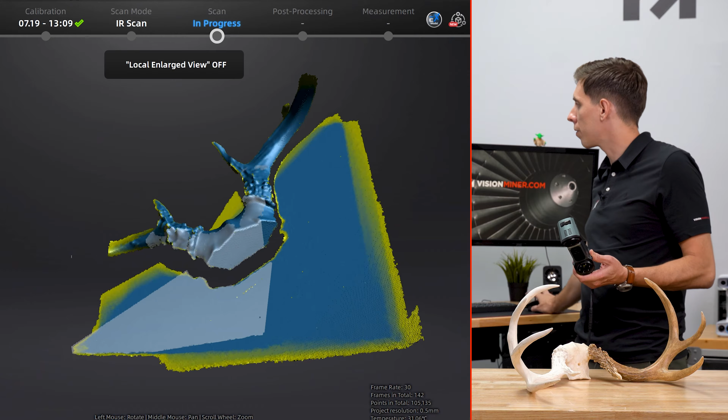Okay, so we're going to start at medium brightness, and we'll leave the working distance 160 to 350 and see what we do. There we go. Hit the button on the back to start. And I'm actually zoomed in too much, so let me turn off local enlarged view. There we go. Gosh, this is nuts. Look how fast that's capturing data. This is just crazy.

Now this will be interesting with all these little antler spires. See if it can track based on that geometry alone. It's doing a great job, that's for sure. I don't have to worry too much about moving the object itself because that's what it's aligning on. And I'm on a flat plane table, so it shouldn't cause much issue.

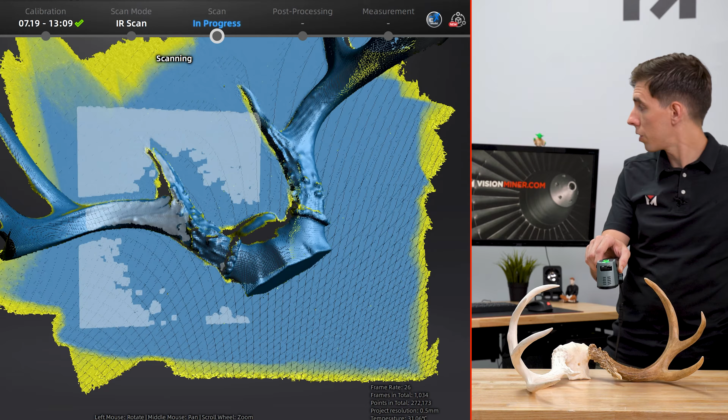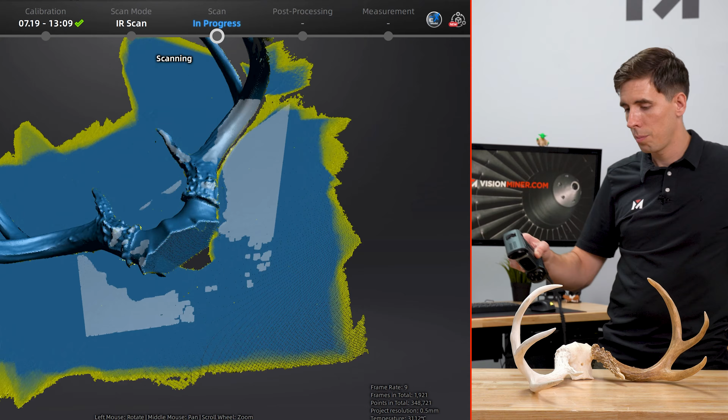I move around my object. And the orientation of the scanner makes a pretty big difference, right? Sometimes you can orient it differently and get better data. And I don't have to get too much of that over there because we will flip this over and then align the two scans to get that underside of this whole object and make a solid object. I'm just going to get as much as I can.

All right, let's check out the data that we got. I'll go ahead and hit pause. Go back here and look. So let's go ahead and do our classic cutting plane. I'm going to click cutting plane and then fitting the point cloud with my selection and hit create plane. Now I'm going to drag that up just a little bit. We're going to delete all that data.

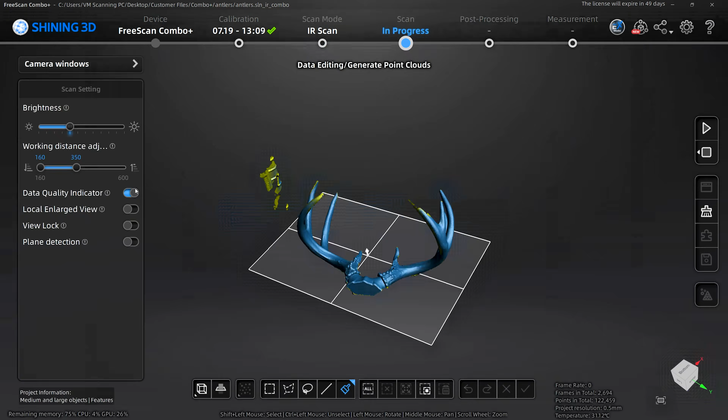So now I'm going to use the connected domain tool to select part of the part and then select the whole part with connected domain and then invert, and that'll select everything that's not the part and then delete that extra data. So I go here, select my part, click connected domain, then I invert the selection and delete. And just like that, we've got the part, the whole part, and nothing but the part. Great, all right, here we go.

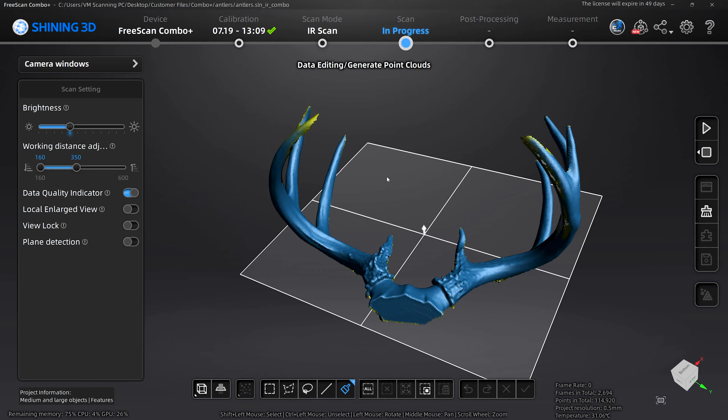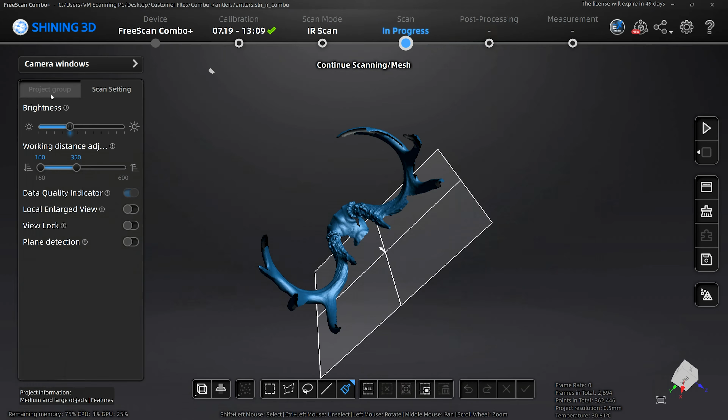Okay, so now to make a second scan, I'm going to align later. I'm going to go into projects and create a new project group. So project group, new project, same specs, and hit apply. So now we've got a blank canvas, and I'll go ahead and just start scanning again.

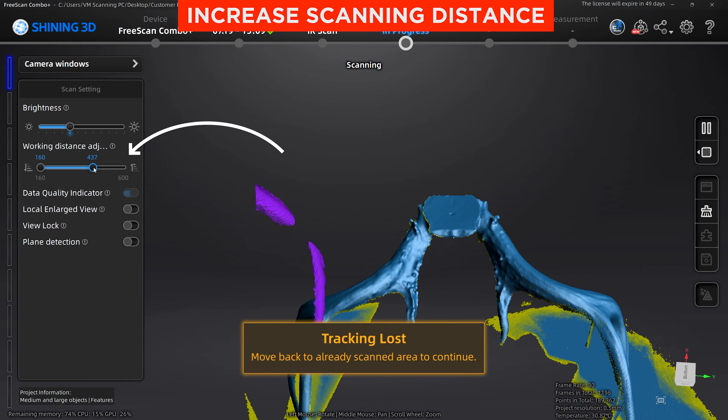And every time it loses tracking, you just got to go back to another area that it's got good data at, and it'll be able to retrack and align itself with ease. Until you've got dense data points in that other area, you might just have to go back and forth a couple times on a complex object like this. I'm going to increase my scanning distance to give myself a little more leeway. See if I can get more data on those tips. Yeah, there we go. It is tracking better.

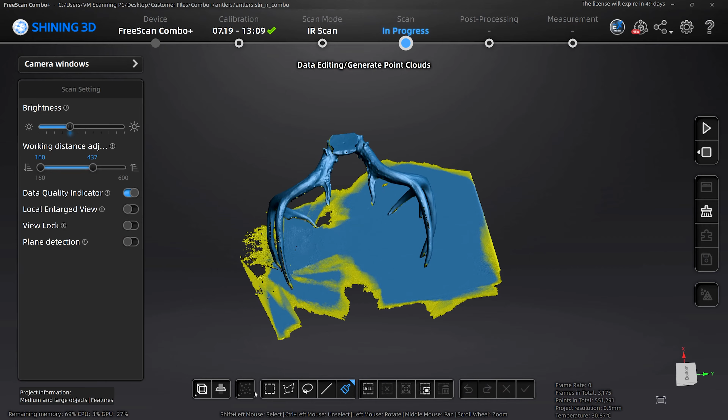There we go. We'll do the same thing again. We'll make a cutting plane, get rid of the extra data. Now I have the option to do another orientation, but let's actually align the first 2 scans first and then pinpoint where we're missing data and need to gather more, and then we can just focus on that area to save time. So in order to align it, I have to generate the point clouds.

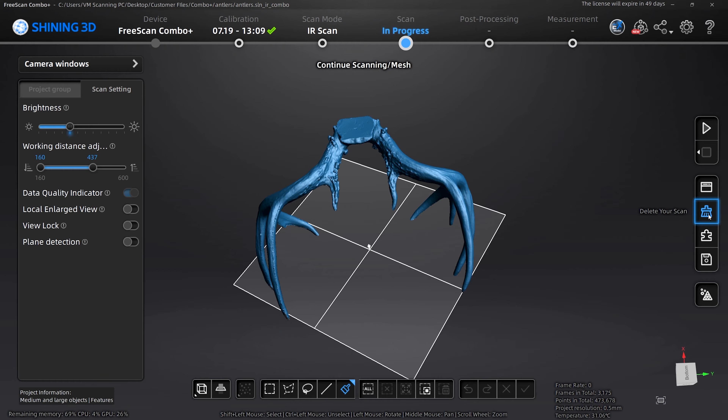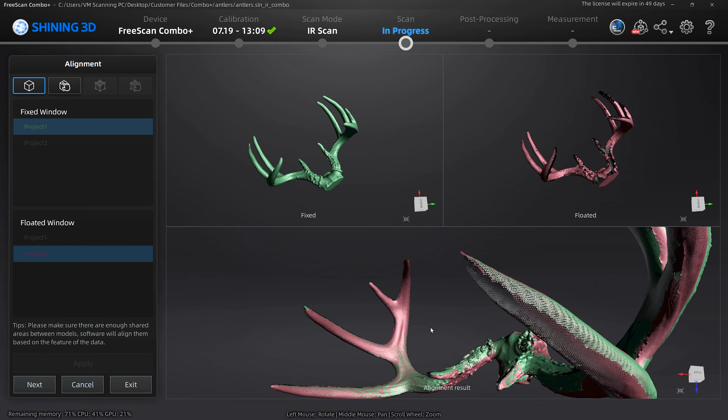Okay, so now we'll head on over here to the Process Alignment tab, and we'll go here to Project 1, Project 2. And once again, we will use the automatic alignment function. If it fails, we always have manual alignment to back it up, but usually automatic works just fine, so we'll give that a shot. And as expected with a part like this, it's very unique geometry. It worked great. So I'll go ahead and hit next and then exit, and let's examine our data.

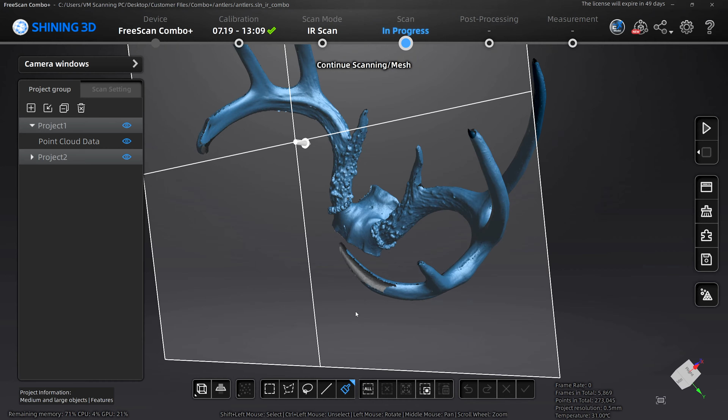Okay. I mean, you know, there's not much missing data here. A little bit on the tips and a little bit of the insides. Oh, and on this side. All right, so I'm gonna see if I can't get those areas first. This should get everything in there. All right, I think we got everything we need. Let's check it out.

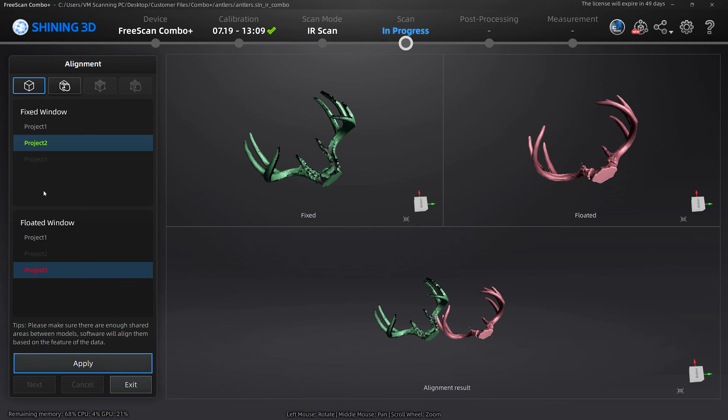Okay, so now we got our third one. I'm going to align again, Project 2, Project 3. Let's see if it automatically works. Next, we are good to go. Make sure Group 1 and that, apply. Again, good to go, and exit.

So now we've got all 3 of our scans in here. I'm still missing that little inner area. That's what I'm missing. So I'm going to go back, and I'm going to get the inside of these. So I'm actually going to flip it right like that. That'll get that inside area.

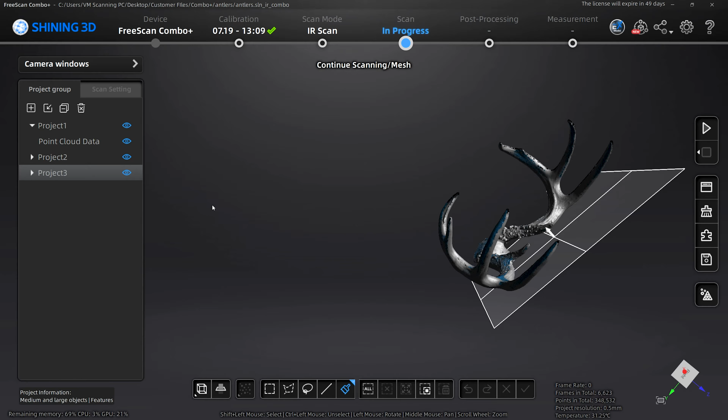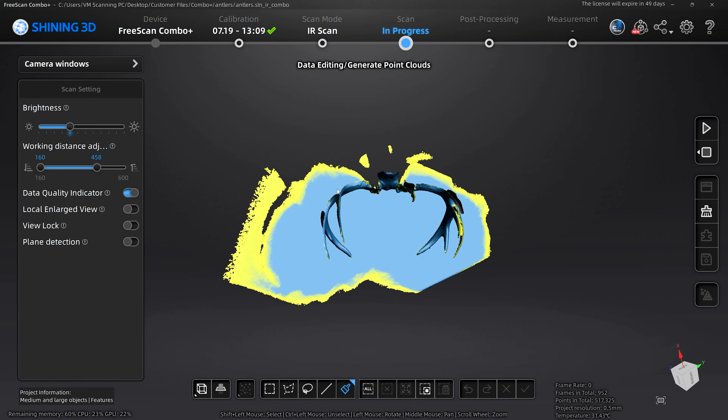All right, so I'm going to scan just the areas that we need. I'm going to increase that working distance slightly. Again, we know the rest of our data is good, so I can just focus on these missing spots. All right, that should be good. Let's go ahead and make the final cuts. Cutting plane.

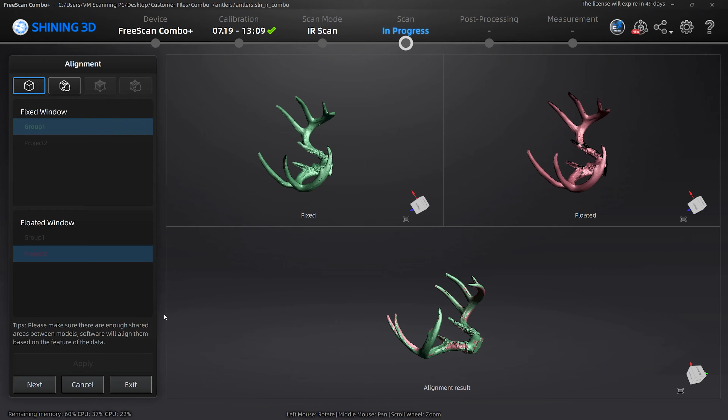Process the point clouds. All right, back into project alignment, and I can take 3 and 4. Auto alignment works great on this one. We're looking good. Next, group that, apply that. Great, next. Apply that one with that one. Align, great. Next, and exit. So now we should have total and complete data.

Select them all to make them all the same color, and then look around. We got it there, we got it there, we got it there. We're looking good. Cool. So the real way to find out now is I'm going to go and mesh the point cloud. I'm going to connect all those polygons, put that graphics card to work.

Now there's a couple ways to do this. If I wanted to 3D print this, I'm going to make a watertight model because it needs to be a watertight STL. If I wanted to reverse engineer it, I'm going to go unwatertight model because that's going to give me the most accurate data. In this case, we're probably going to take this into something like a 3D printer, so let's go ahead and do a standard filter just to smooth out the rough bits just a little bit.

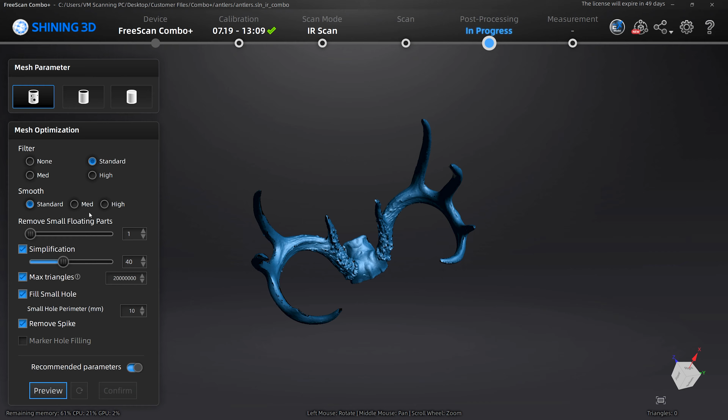And then, of course, standard smoothing. I'm not going to go too crazy with it. I'm going to leave the defaults. I'm just going to do 40% simplification, see what that ends up looking like, and remove spikes and fill small holes. Let's go ahead and hit preview, let it chunk away, and see what we're going to get before we take it to our manufacturing method.

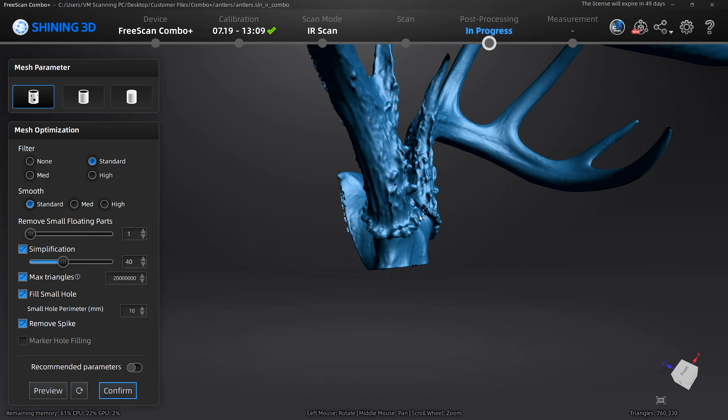Awesome. All right, here we go. Let's take a look at it. This should be pretty darn good. Well, let's see. Okay, great. So maybe we can get a little more detail at the tips here, throughout there. We're going to go ahead and take this to watertight and preview that.

When you process a watertight mesh, it's just going to fill all the holes. So you have a totally solid watertight mesh file, STL, OBJ, 3MF, and that's important before you put it into your slicer to 3D print. Now, if you're interested in 3D printers, say you wanted to make replicas of antlers like this for trophies or whatnot, this is a great application. You can scan it and take it straight into a 3D printer.

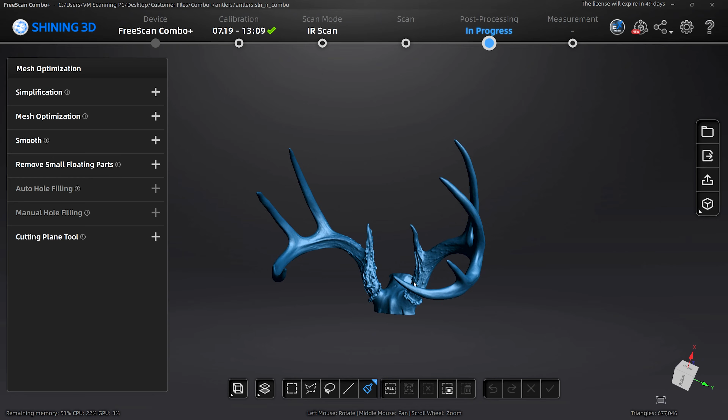All right, here we go, watertight. So now if we zoom in, you can see, there it is smooth, it is very detailed. Let's confirm. All right, here's our data, here's our mesh. Fantastic. Now we could go and just export this scan.

You can either save it locally on your computer or you can take it directly into EXModel, which is reverse engineering software that we have available.